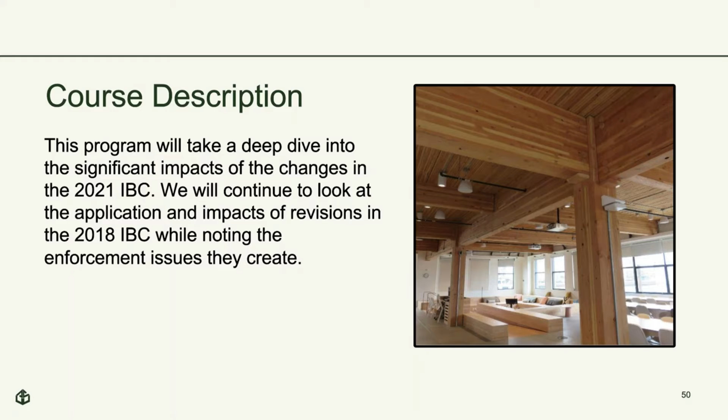Again, we'll be talking about what happened and resulted in the 2021 International Building Code. We'll be looking at those changes that we can, and discussing some of the impacts of those revisions.

Here are our objectives, pretty obvious for this particular class: to identify the differences between the previous code, the 2018 edition, and the 2021 IBC. I'll explain any new code concepts as much as I can in the time we're given, and try to identify the impacts of those revisions on the various groups out there, in particular on the enforcement side, noting those issues as well.

So we're going to start. We are in chapter 10. This is the first of those items identified as significant code changes in the 2021 edition. Very, very interesting to go through a lot of these.

Like I said in part 1, while ICC sometimes identifies these as modifications, I believe most even identified as modifications are really clarifications. And this really helps us with the application of the code to some of these areas, especially in chapter 10, where we need to provide egress paths from given areas within a building or structure.

In this case, these are largely unoccupied mechanical rooms and penthouses. Penthouses are an allowable projection above the roof line itself, so they don't count against the actual height of the building. The ICC code change in this case seems to identify the mechanical rooms as also being on the roof, but in reality, the way the code is set up, this identifies the removal of the common path of travel determination for these unoccupied mechanical rooms wherever they're located within a building.

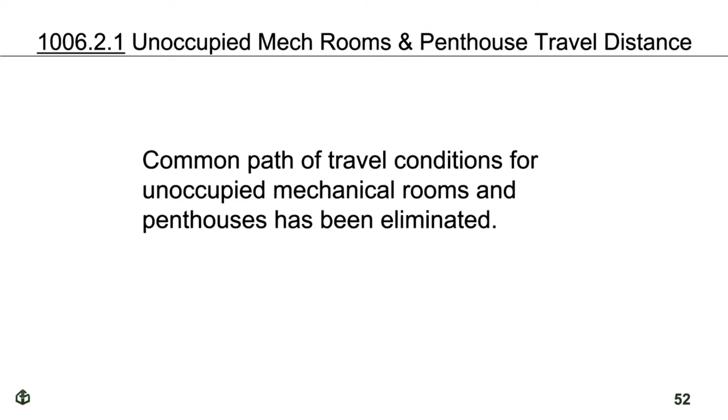Again, sticking with our exit access travel distance criteria, there is criteria in the code, a couple of tables that allow for a single exit from a story or an occupied roof now. The travel distance limitations are based only on exit access travel distance. We're already allowing a single exit, so we don't have to have the common path of travel determination applied in this particular case.

It was very interesting to see the common path of travel applied in some of these very large, typically complete floor build-outs.

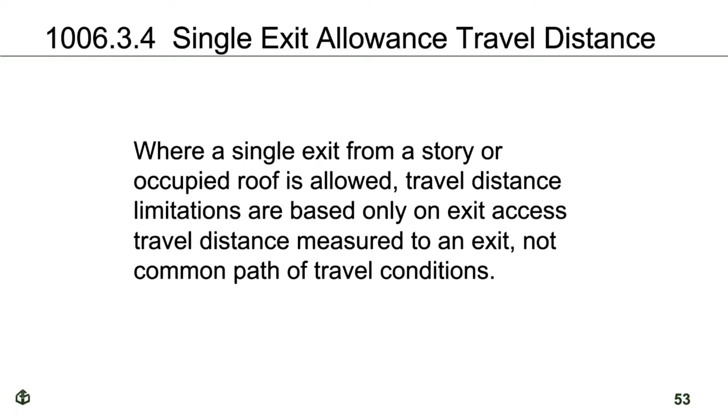They would have space left over for employee break rooms, things of that nature, and sometimes it was very limiting as to what kind of design you could have for those particular spaces. You may actually have needed a second exit access doorway out of some of those spaces in the past. In this case, this allows us to have some of these unusually shaped spaces, maybe very long and narrow, like a shoebox kind of thing, exist without having to have that determination or criteria to deal with.

Again, we do spend a little bit of time with illumination. Very interesting exit sign identified in the picture here, that's the running person. That is something that is accepted internationally and is making its way here in the United States much more so. Whenever we have exit access or exit stairways, we want to make sure that people can actually see what they're using, because stairways are inherently hazardous, just because of the tripping hazard.

And so the required level of illumination has been increased by 10-fold, from 1-foot candle to 10-foot candles. 1-foot candle is fairly dim. Actually, the picture in this slide kind of gives us an idea of what 1-foot candle may be like. I haven't measured this, it just looks very much like what I've seen for 1-foot candle type locations. 10-foot candles can be fairly bright, and so we like that.

Again, we don't want people to be surprised by that first riser in a stair, typically going down or going up, and then tripping and falling and potentially hurting themselves. So this is a very good code change. I think it was something that was kind of a weakness in the previous codes in terms of providing the actual protection we're looking for the occupants that are served by these stairways.

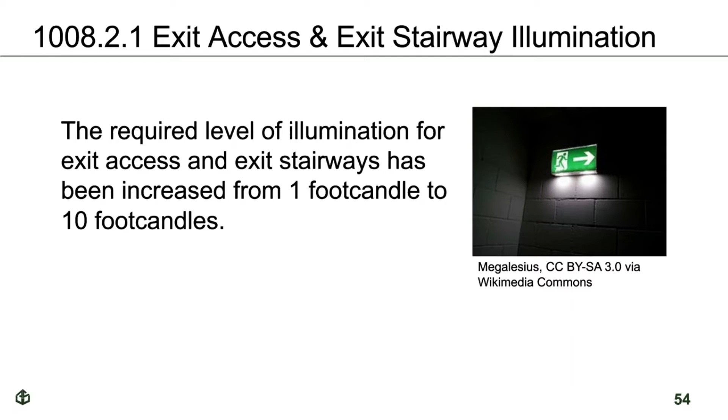We've added a new condition for when we actually have to have an elevator to different levels, and occupied roofs are now part of that. It's not just floor levels within the building. So whenever you have an occupied roof that is more than 4 stories above the level of exit discharge and all that, then we have to have an elevator to that particular level, including the occupied roof. Obviously there's accessibility concerns, there's a lot of issues built into this.

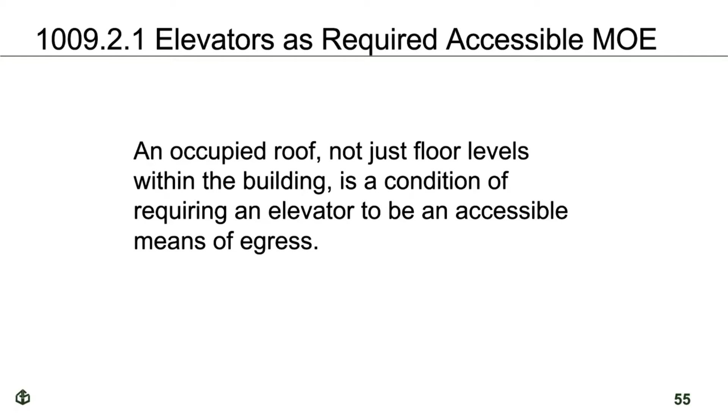This is in section 1009, which is for accessible means of egress. We want to make sure that those particular facilities that are located in and on an occupied roof are available to people with disabilities, and this particular code change recognizes that. There's been a lot of work with occupied roofs in this code and the previous code, the 2018. We're actually seeing this pop up more and more, and probably will as we move on into the future, certainly in the 2024 ICC codes.

Sticking within the accessible means of egress criteria, we have interior areas of refuge that previously were only allowed to go to an elevator lobby or a stairway, lobby, or landing, that kind of thing. We now can have these interior areas of refuge access exterior areas outside the building. It could actually go out to an exterior stair or just directly out to grade below with a landing and out to some sort of pathway away from the building.

The idea again is that people can potentially reside there for a short while, maybe there's some sort of a problem with getting down to grade from that particular point. And so we allow for that interior area of refuge to also access the outside, not just stairways or elevators, which basically recognizes upper levels rather than the level perhaps at exit discharge and the like, or at grade. So it's a good code change. I think this will actually serve people with disabilities very, very well.

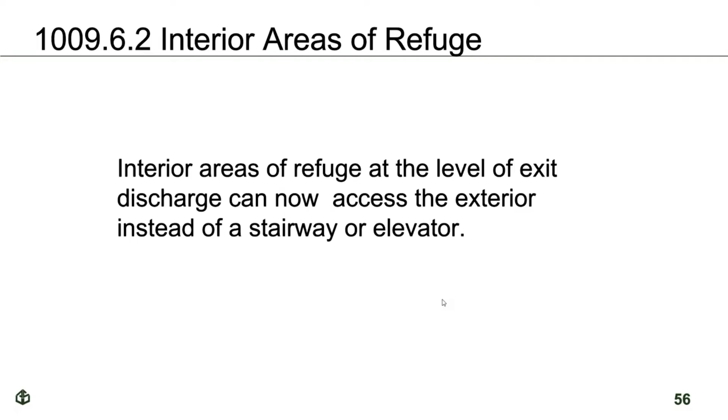We did notice that it was larger than the space we had previously required in most particular cases. This is something that's actually a little bit personal to me, and I think this is a great code change. We're still going to see a lot of accessibility code changes moving forward. In this particular case, we're still in the accessible means of egress, but we're getting a more realistic type of wheelchair space in those areas where we're setting aside areas like interior areas of refuge we talked about previously. So again, a very good code change.

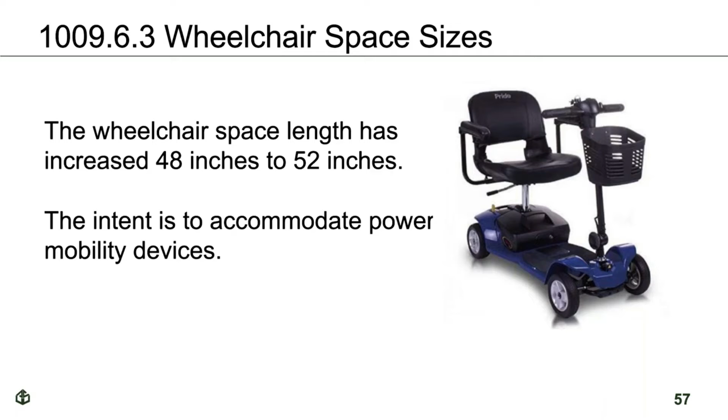Starting into chapter 11, we have a new addition. It's very interesting to see the adoption of standards. In this particular case, ICC is the secretariat for the A117.1 standard. They have been for a long time, as a matter of fact. I had the opportunity, when I was with the Model Code organizations, to participate as an alternate, and there are some very interesting discussions and work going on. You can see that the previous edition was the 2009 edition, and now the latest edition is 8 years later, 2017. This tells us that it's not really linked up with the adoption process or publication process of the ICC codes, as many standards adopted by reference are also not linked up. So we get these periodically. It's been a little bit of a challenge to get this one through, but they've done that, and we now have that adopted.

In the 2021 edition, we need to have this available to us so that in our designs, our enforcement, or the actual construction project on site, we know what those changes are, because they are in effect now when the local jurisdiction adopts the 2021 codes.

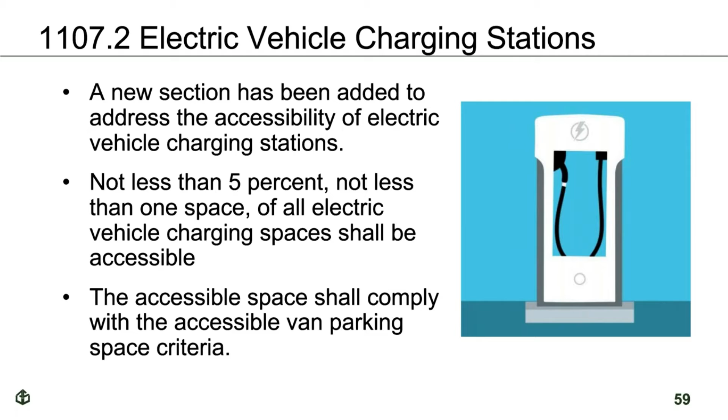The industry has been very proactive in working with ICC and others in developing accessible features to their charging stations. But we have this in the code, and this is a mandate that will be moving forward with the adoption of the 2021 code. We do see a lot of electric vehicles popping up now, and frankly see a lot of people using these parking spaces to charge their vehicles, sometimes even when they're not using the facility where the EV charging station is located. But they get to use that, and we have that out there now, recognizing this trend for EV types of vehicles.

Accessible bottle filling stations - we have a lot of these now. People are taking their hydro flasks with them all over the place. Whenever we have these stations provided, they shall be accessible. Mostly they are triggered, or activated, by either a press button feature in the back of the bottle filling station, or there's a sensor that notes that when the bottle is there, it needs to fill it. So typically it means they shall be within reach ranges, available to somebody in a wheelchair that needs to fill up their bottle.

However, there is an exception provided for those types of bottle filling facilities when they're over accessible drinking fountains. The drinking fountain is already accessible, and presumably someone can drink from it instead of just filling up their water bottle or hydro flask when they get to that particular point. So we recognize that as well. It's not a bad idea to have even these stations accessible, but that is not a mandate within the code based on this new exception.

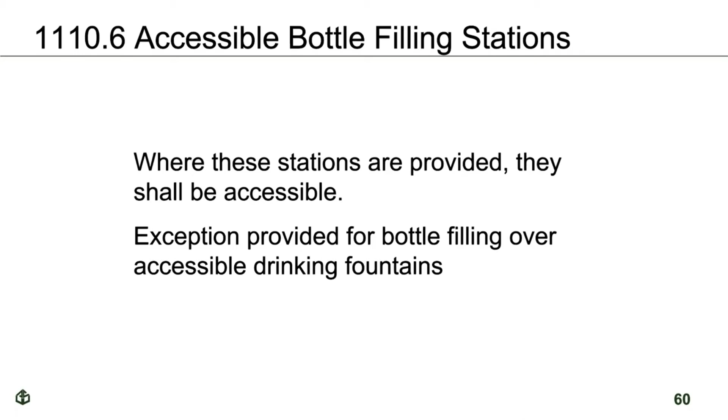Moving on into Chapter 12. This is a fun one. We're familiar with Group E occupancies - those are the educational occupancies. A lot of our jurisdictions across the United States do enforce the code for schools, typically primary and secondary schools.

This mandates that we have, using the A117 accessibility standard, enhanced acoustics for certain classrooms. Those classrooms where these enhanced acoustics are required have a volume of 20,000 cubic feet or less. The larger ones presumably have that and we're good with that, but we don't measure classrooms or any other building by volume typically. So we're going to have to know that.

Certainly for a very standard and regular, rectangular shaped cube, it's very easy, but not all classrooms have that. So we're going to have to go through and come up with a way of hopefully simply, otherwise we have to go through a much more complicated method of determining the volume of these classrooms.

So we have this here. In California, we don't actually use the A117 standard and all that - we have our own criteria, but we have this reference to the A117 standard as well. So it's the first time we're really getting to use that. It'll be very interesting to see how this plays out going forward.

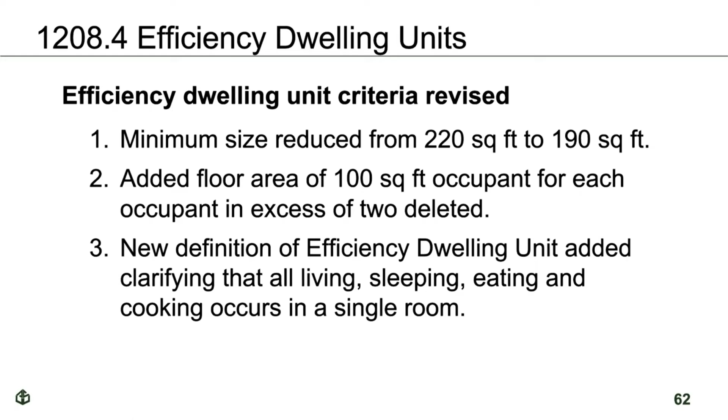This is going to be a very interesting one to try and design to and try to enforce. We've had this in other areas, but this one in particular has some very interesting nuances to it. So public restrooms are now required to be visually screened from the outside entry or exit doors for privacy issues.

So if you have a multi-facility type of restroom, you're going to have to provide either screening or perhaps a little different layout of the access into that particular restroom, so that when the door is open, people cannot look in and see what folks are doing.

So the challenging part is the second bullet. There's an analysis that's required if there are mirrors that could compromise privacy, that could be used to see people on the other side doing whatever it is they're doing. I don't know how or what method we are going to use to either design to that or certainly to enforce this particular provision. Obviously, there's a lot of public restrooms out there, and we're going to have to come up with something.

Now, like with so many things in the code, there's exceptions. A lot of people say it's an exceptional code as a result. But we have an exception, and an obvious one, for single occupant toilet rooms. Mostly because you get into that particular facility, turn around and lock the door. So if you're in there taking care of business, people are not going to be able to open the door and see you there. So we have an exception for that, but we're going to have some challenges with this.

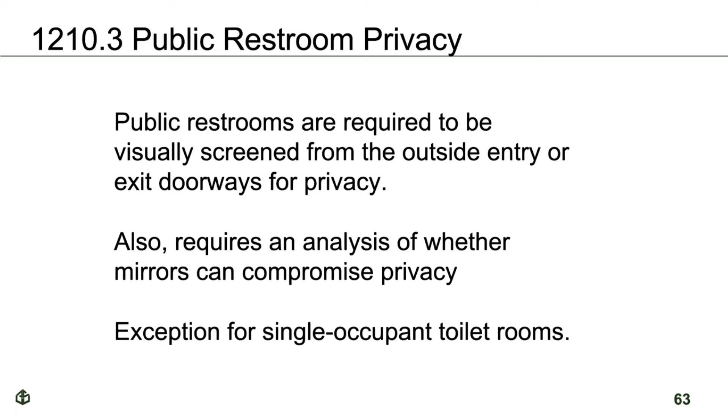It's a very simple code change, I think, but it's got some big impacts on both the design and the enforcement side, all told. So I hope there's not too much trouble out there with this particular one, and that ICC comes up with a good policy that can be used in terms of the methodology.

Chapter 14. There has been a ton of work, and there continues to be a lot of work in the code development cycles on vapor retarders and water-resistive barriers. There's a lot of concern with that. The control of moisture is huge. This particular code change reorganizes and clarifies the application of these provisions much more simply than I've seen in the past.

I have not enforced this particular criteria myself yet. Of course, I am with American Wood Council, so I won't be enforcing this, but in any case, we'll be talking with friends who are going to be enforcing this to see exactly how this works out going into the future. But I think they've done an excellent job making this criteria a much simpler set of requirements for the application of various types of vapor retarders, depending on whatever climate zone you're in.

And we have other criteria here too. The funny thing with a lot of this is that these particular code changes frequently go in front of the IBC structural code development committee, and it's not exactly a structural concern, but they get to hear all of the code changes and make a recommendation moving on to the ICC membership. So it's a very interesting thing. Note that this is related to energy conservation and the control of moisture. We're going to be seeing, moving into the future, for several cycles of codes, a lot more significant changes coming up.

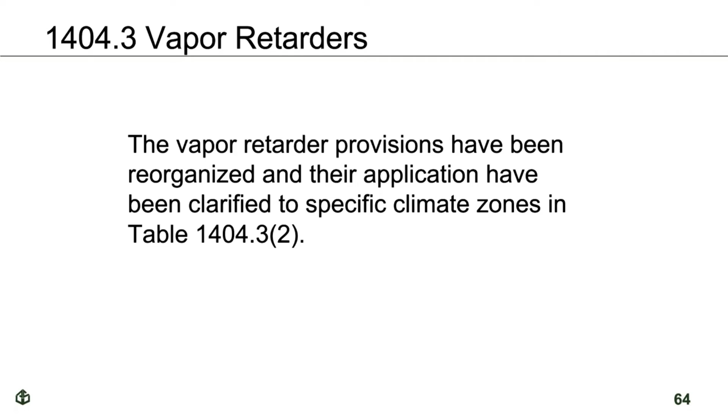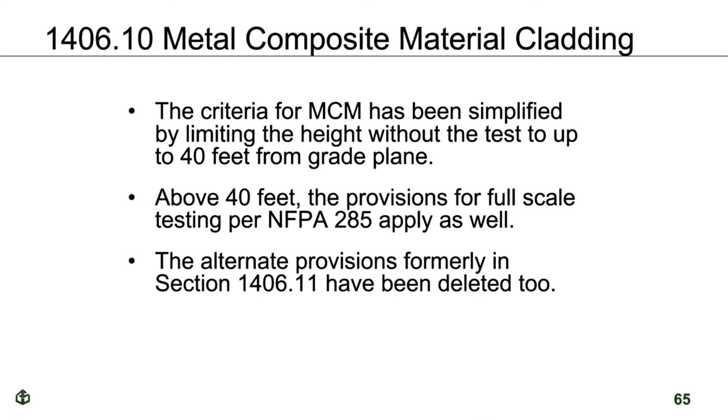The alternate provisions that we've had previously were not felt to be that desirable, so they were eliminated altogether. So we have either the prescriptive criteria that we have in the code itself, or the application up to 40 feet, and then 40 feet and above, we need to make sure that that particular product has an evaluation report or some sort of listing and is tested to NFPA 285 moving forward to provide the fire protection we're looking for in this particular application.

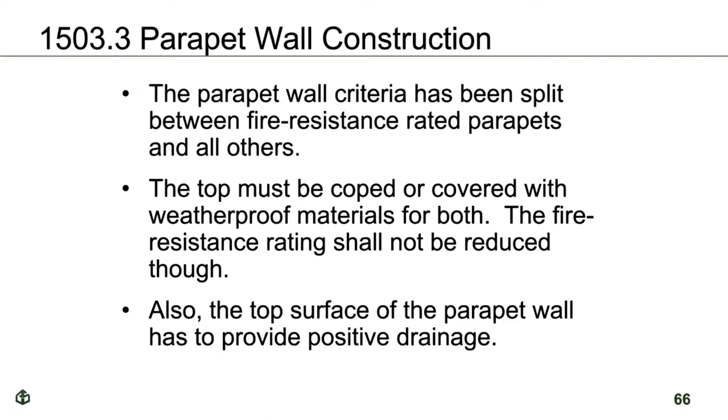It's a pretty small detail, but our inspectors in particular are going to have to know this when they're looking at these particular projects. Maybe they're large multifamily projects or hotels where you have interior parapets in particular, but this also applies potentially to exterior parapets when they're required.

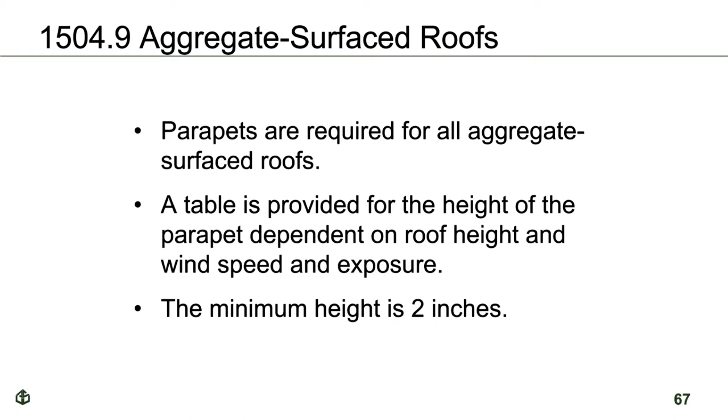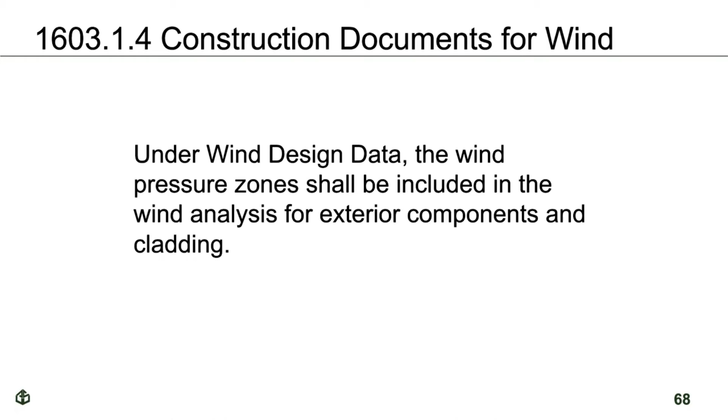A lot of this is being coordinated with ASCE 7, the ASCE and FEMA Seismic Code Support Committee, and others - NCSEA, the National Council of Structural Engineers Associations, and a number of other groups are tracking this very, very closely. They're trying to make what's provided in those structural standards consistent with what's in the IBC, and the IBC consistent with those structural standards.

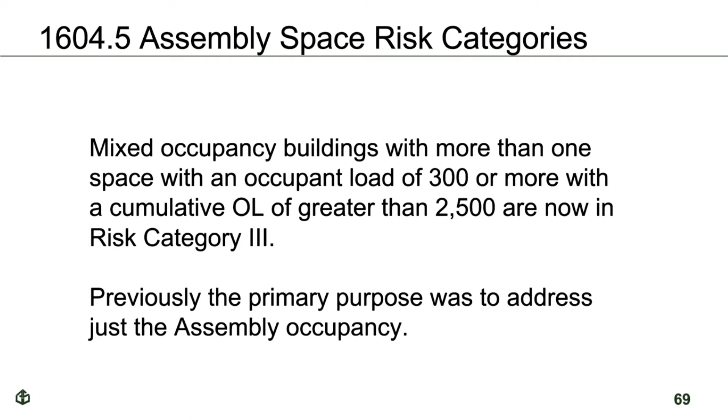I included this one, I just find it kind of funny. I don't know that I have ever looked at, reviewed, or designed a fixed ladder that serves some sort of industrial type structure, maybe an industrial work platform, who knows.

But we now have loading criteria for those fixed ladders, including ship's ladders. Those are just a little different design - they are ladders, if you will, just angled a bit, with a place for each foot.

We have this design now called out in the code, so when it's called out in the code, we have to review for that and design for that. A lot of these are prefabricated types of ladders and things of that nature.

Fortunately, they've been used over and over again, and the engineers involved with those industrial, factory, storage types of uses are very familiar with this criteria, but it's just something we now have to look for on the enforcement side in plan review.

Presumably out in the field where the project is being constructed, our inspectors are going to have to know that's done too. It can't just be something that's brought in. It could be an RFI where you send them back to have the ladder configurations reviewed by your plan review staff. But we have that now in the code, and we have to look for it.

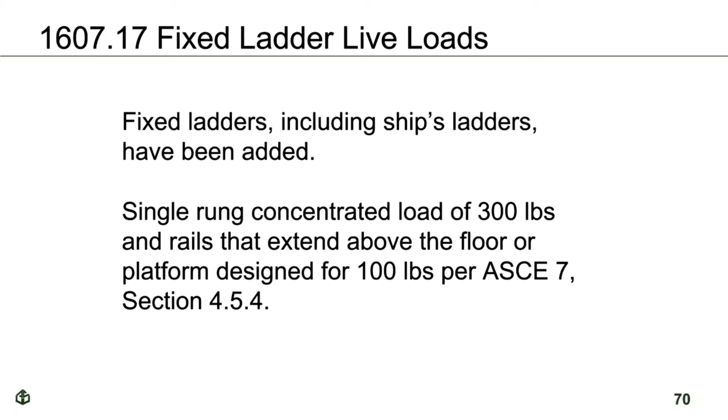There's more and more being added from a structural standpoint that we have to make sure is included within the construction docs and the analysis provided. It's a challenge at times - it seems like things are being added that we haven't had trouble with in the past, but we have to include them now. That's my opinion, and it's what I think has happened in this particular case.

Chapter 17, our structural observation and special inspection type criteria, basically causes us to view chapter 17 as more of a QA/QC type set of criteria. Structural observation was developed probably 30 years ago - it's been quite a while. I remember when the structural engineers were starting to bring this into the legacy codes and all that.

But we now have to make sure that the structural observation stages or inspections are called out in the approved construction documents. We want to make sure that's listed there so it's as obvious as it can be to anybody.

One unfortunate aspect of construction is that usually when you get into the job, those general notes, observation points, and special inspection requirements sometimes get folded in the back, working directly on the framing plan for whatever type of structure it is. But we need to make sure this is happening.

The structural observation process also has to be something that is known and continues to be a regular process for our engineers doing the design, so that their people can come out and make sure what's been in the approved construction documents actually occurs in the field.

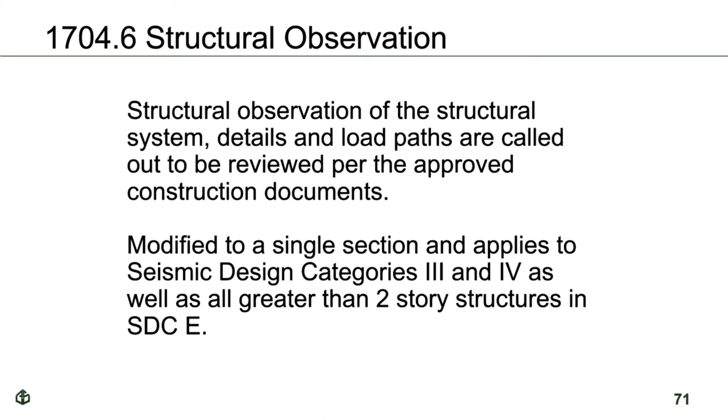Special inspection criteria - you're going to see not just in these slides today, but in other cases, that there is a lot more special inspection criteria. They're actually causing these special inspectors, or what people used to call deputy inspectors, to go out in the field much more so than they have in the past.

Typically they're looking at connections, and you can see certainly in this particular case that's what we've got. Although item 2 says the completion of reinforcement across joints, well, that joint interface is really like a connection.

We want to make sure those are done correctly and in a quality, workmanship-like manner, because if there's going to be a failure with precast systems, it's typically not in the precast element itself - it would be in the connections. So we want to make sure those are done properly. We get those.

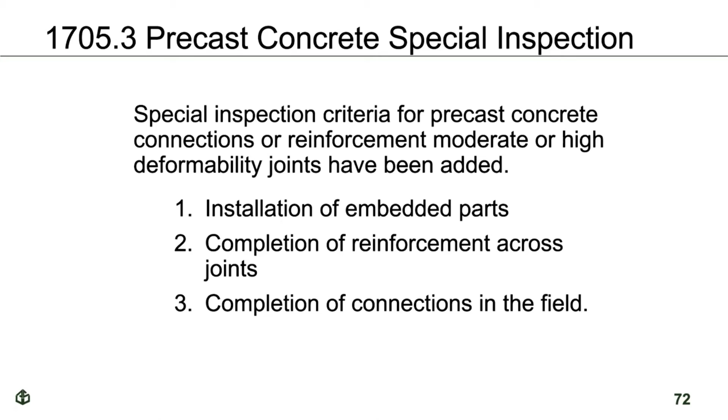We've got a lot of criteria in Chapter 17 that you're going to be seeing, some of that today. If you're not familiar with that, certainly you need to dive into this particular area, because the application of this criteria is becoming much more rampant than we've had in the past, and has really created a new industry group in particular for conducting these special inspections.

We've also now got an adoption of ACI 550.5, which gives us installation tolerances, which we don't have in just about anything else. But we have that here, and the special inspectors are going to make sure that in these precast elements, we're getting those elements installed within the ranges we're looking for. So we've got that now.

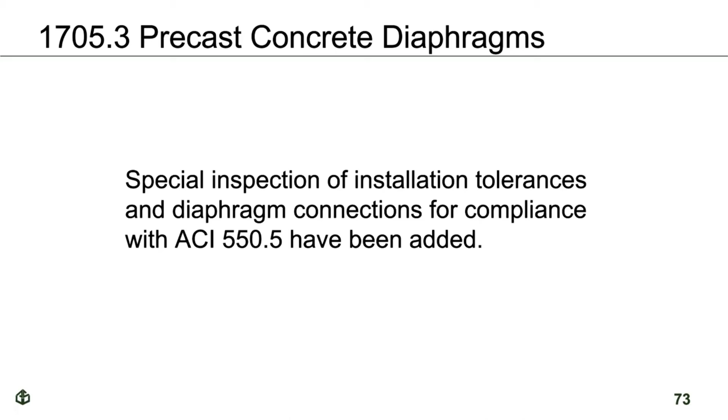ACI has their own standards development committee that has worked on this along with ACI 318 and others. We have that being handled by industry, so hopefully the people out in the field doing concrete construction, particularly precast concrete construction, know about this and are complying with it already. It's very interesting to see these standards added. Presumably we'll be looking at other types of tolerance-based standards in the future, and this is one of the first ones we've had.

Moving on into masonry, in risk category 4 structures, they've basically eliminated the application of empirical design, or empirically designed masonry. As such, we don't need to provide special inspection for it because it's not allowed. So effectively they've taken that out. It's a coordination code change with what occurs in the masonry chapter in the IBC.

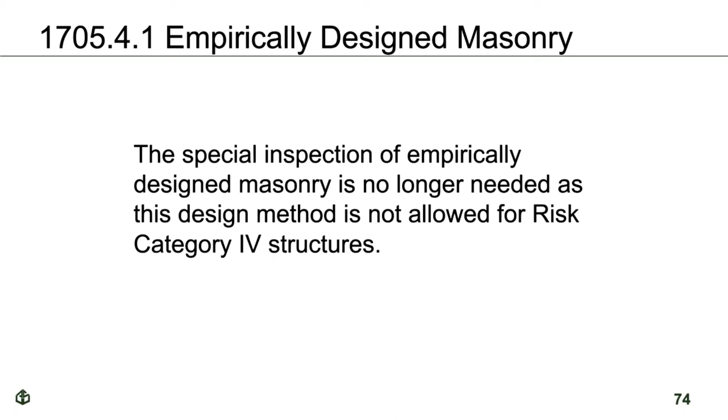Mass timber - we talked about this in the first part quite a bit, actually. It's really been, like I said before, one of the biggest code changes I've seen in the construction material area ever, honestly. It uses timber in such a way that it's brand new to a lot of us, and certainly the inclusion of type 4A, type 4B, and type 4C construction that allows for much taller buildings than we're used to is very, very interesting.

In fact, there's been some testing recently at the UC San Diego shake table, where they're testing a 10-story full mass timber building to different earthquake loads we've seen, based on earthquakes we've seen, to see how they perform. So we're going to see a lot more complete mass timber buildings going out.

As I said earlier, with special inspections in particular, we are concerned about the connections. These are like precast concrete - these are prefabricated panels, typically, or prefabricated elements. And so they have their own QA, QC in the factory based on their approval as an approved fabricator. So we're going to see the erection of the structure, which leads into all of the laundry list of connections that need special inspection as this building is being erected.

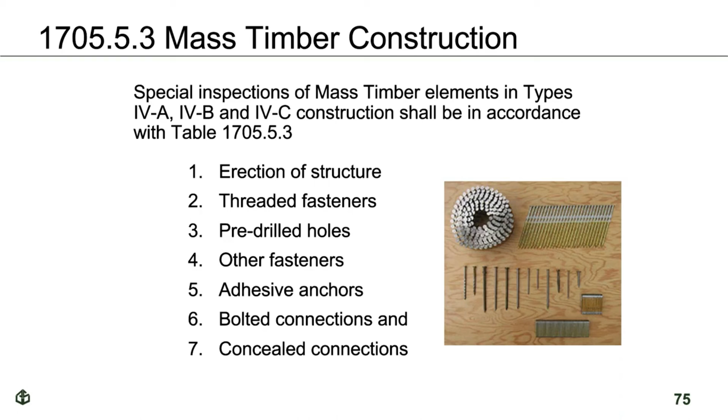Steel storage racks - this has been a fun one. We get a lot of steel storage rack configurations out there in our big box stores and our large distribution warehouses, among others. The industry itself, the manufacturers of these systems, has been very concerned about the application and installation of these rack systems. So they actually put forward this particular code change to make sure that what is being installed out in the field matches what is on their approved construction documents, because they have engineers that put these together based on the information they have for their particular products. They want to make sure that all that gets put into place.

So as we talked about earlier, special inspection is concerned about connections. We get that.

Items number 3 and 4 in particular are based on that: the completion of the storage rack system, making sure it's all put together well, and the anchorage—obviously we want to make sure that it's anchored down to the footing or the slab sufficiently.

Materials in compliance, fabricated elements and materials in compliance with approved documents is a very interesting discussion, because apparently in some cases, people are mixing and matching different manufacturers' criteria or elements in a given steel storage rack installation. And that's not a good thing at all—that violates their warranties and all of that. So we have a real problem out in the field.

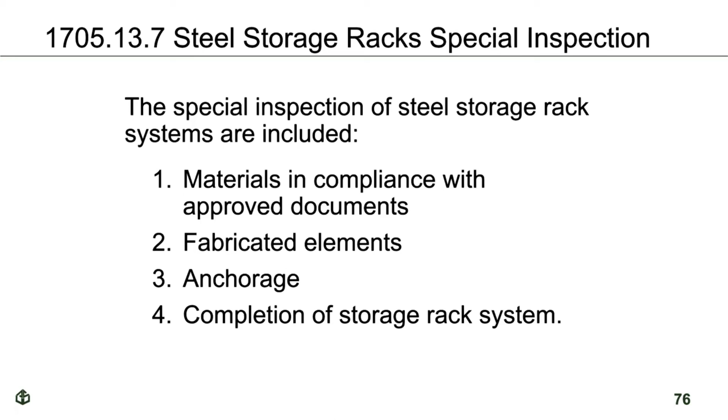In residential types of settings, very large residential settings, when you have fire areas maybe separated by firewalls, things along those lines, where there's an occupant load of 250 or greater—okay, we get it, the increased risk category. But in this particular case, we're in the special inspection criteria. We impose in the code special inspection of all of these penetration types of elements. So it's not just conduit going through walls, it's the joints in between elements, and it's even the exterior joints between cladding and a fire resistant floor that gets this criteria.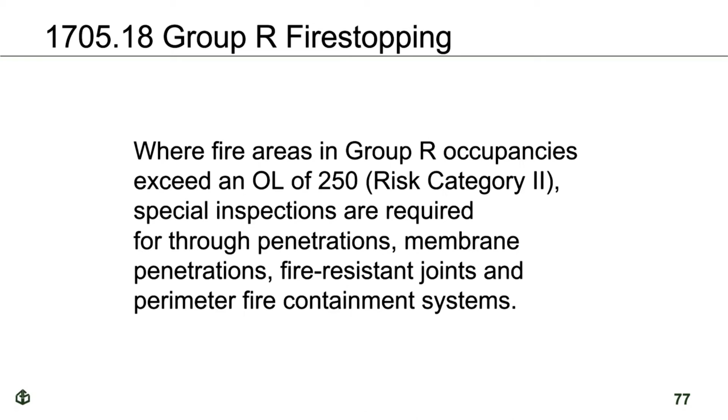We need to make sure that our special inspection staff are inspecting those and providing us with the reports that are necessary. We have a lot of people living in these settings, 24/7 presumably, right? And so we want to make sure that they're provided with the protection that we expect for these Group R occupancies, typically large apartment hotels, perhaps other types of settings too.

This one has a big impact on our inspection staff. We have now a label that is required for garage doors and for rolling, typically vertical rolling doors. That label has to be a pretty good sized label because it includes a lot of information. And then someone—this isn't 1705, this is not special inspection—someone is going to make sure that that label exists and that that door is appropriate for that particular installation.

So you get the door manufacturer, the make and model—we get that. Typically you see that anyway because they identify their various models and their own doors. But we also get the positive and negative wind design pressures that this door has been tested to and can comply with. We get the installation instruction drawing reference number, something I don't think I've ever seen on a label before. And we get the applicable test standard included. So we have to have all this information—our inspection staff are going to have to verify this so that that door can be approved.

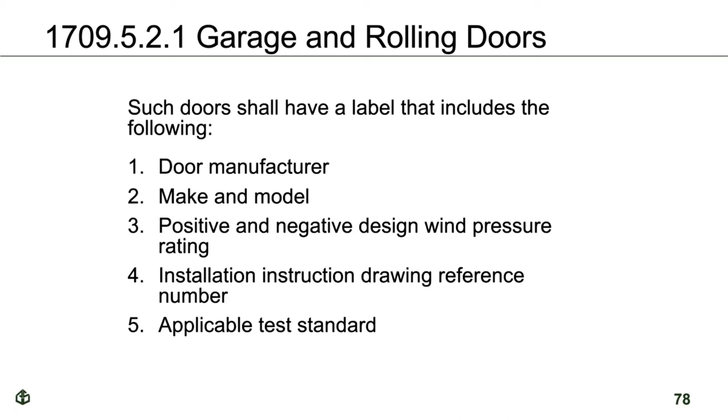Now, I haven't seen a lot of retrofit or replacement door permits in these types of settings, but if they do happen to come in, certainly we would make sure that this label exists. Typically in new projects, this is where we're going to see this more and more.

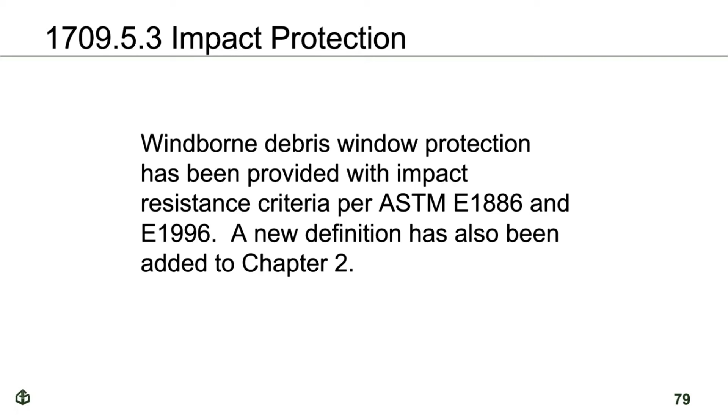Impact protection—in part one we talked about the definition, we already make reference to it in chapter 2. We have that criteria called out here. ASTM E1886 and E1996 are the standards for the window protection that are imposed in those areas where you have wind-borne debris. It's hard to say that for some reason, but we have that imposed here.

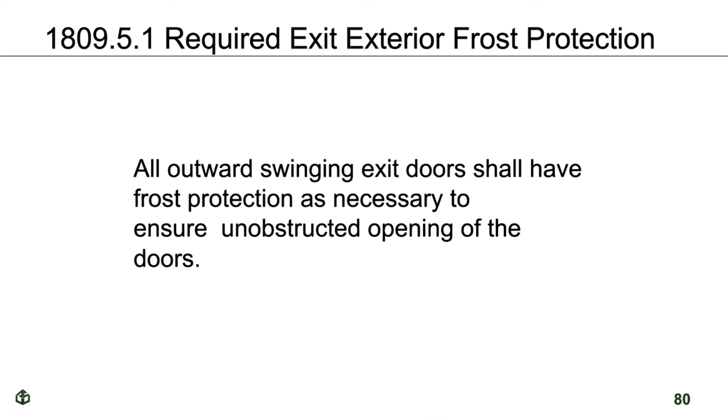Required exit—this is a funny one to me. Living in California, we don't get this that much, at least from day-to-day experience in the winter. But we have all outward swinging exit doors shall have frost protection necessary to ensure the unobstructed opening of those doors in the event of a winter storm, presumably, right? Very interesting considering that this year, 2022 into 2023, here in California and other parts of the country, we had a very big winter and had upwards of 40 feet of snow. Very difficult to keep those swinging doors clear and all that, but it's supposed to be there—we're supposed to have that kind of frost protection provided.

Here is more within our concrete tolerances. Again, in keeping with what we had with ACI 550.5, we have structural concrete tolerances also in the IBC. Again, the important thing is look at the exceptions.

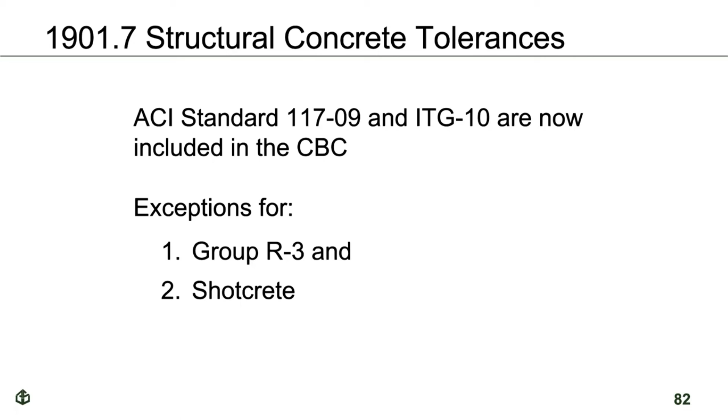Shotcrete, we get that gunite kind of thing, the tolerances aren't built into that. It really wasn't intended for that, and there's a different standard for that. And for basically single-family dwellings and duplexes, we don't have these standards imposed, but for everything else, we do. So know that that is part of the code that we're now starting to enforce.

Keeping up with the steel storage rack criteria for rack structures that are 8 feet in height or greater, of course, and there's plenty of those. You go into big box stores or distribution warehouses and all of that. We understand those, they are big structures. Also, they happen to be constructed in or proposed in a seismic design category D, E, or F. Again, being here in California, there's other places I get it that have this seismic design category.

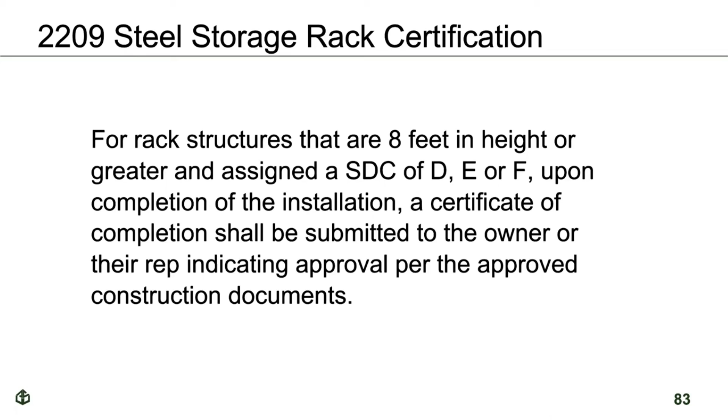A completion certificate is provided to the owner or the owner's rep, indicating that the system has been installed per the approved construction documents. This is in the code itself. We need to make sure that certainly the installation folks out there understand that this is here, and this is basically pointing to our inspection staff to make sure that they're getting these certifications, hard to say again, with these installs once they're done. Again, they're fairly tall, doesn't give a floor area per se, but they're in high seismic design category areas, and so we want to make sure that this has been done to those approved construction documents.

Chapter 23, we have a number of code changes here. I'm with the American Wood Council, and obviously we put an emphasis on this, rightly so. We have additional consideration for the effects of cross-grain changes that can occur when wood dries out after installation. Typically, we don't assume that wood is getting more moist, but that it's drying out because it's within a wall assembly or it's exposed to the interior and the environment is drying it out, pulling the moisture out and exhausting it to the outside. We want to make sure that any sort of dimensional changes that occur are accounted for in the design.

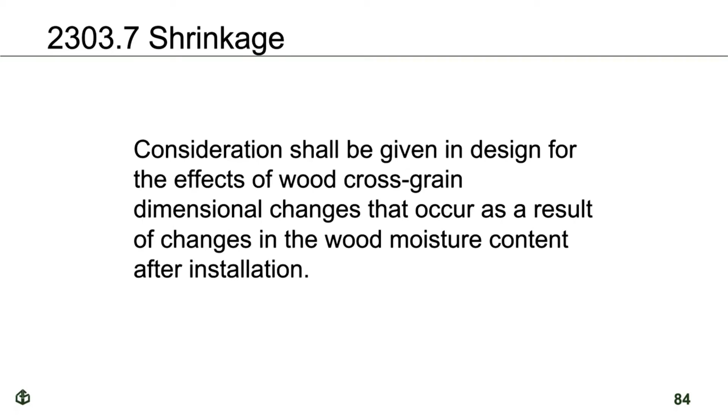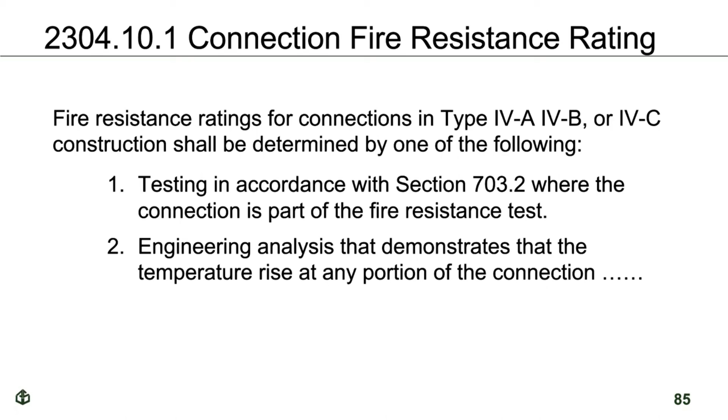Connection fire resistance, this is our mass timber criteria. Again, look at this, it's for our connections. There's protection applied to the mass timber types of construction A, B, and C, but we want to make sure that the protection for the connections is also provided. So there's either testing of the type of connection detail that's provided or some sort of engineering analysis that goes along with it that makes sure that our connections of these mass timber elements are going to withstand certainly the fire or the effects of the fire in that particular design. So we have that built into this criteria now, it's in the 2021 IBC.

We've got a lot more fasteners going on here. Typically, we're doing research, and in this case, there's been wind criteria that has caused us to look at the fasteners and provide a little more detail for our nails in particular. So we have that in our fastener table or fastener schedule, if you will. We need to make sure that that is in our projects, or at least imposed on our projects. This criteria is consistent with typically the national design specification that the American Wood Council publishes and promotes.

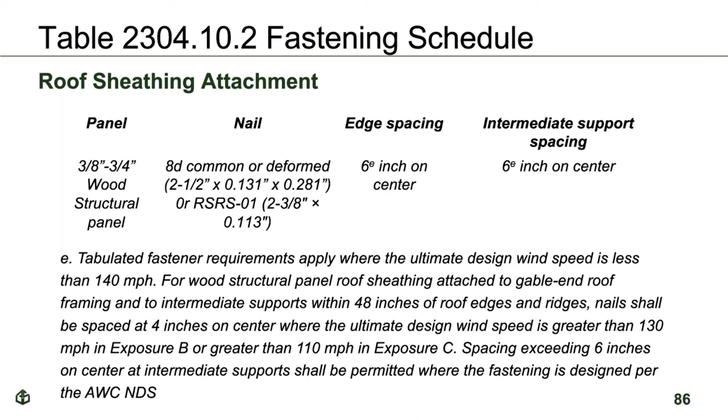Rafter tie connections, again, connections. You can see that there's a theme with a lot of these code changes. We want to make sure the connections are done in a code complying and quality manner, because that's where the weakness point is. We're talking about certainly our heel joint connections in this particular case. We want to make sure that they're provided in the manner that we need them. Take a look at this if you're doing wood design, Chapter 23 has a number of changes throughout.

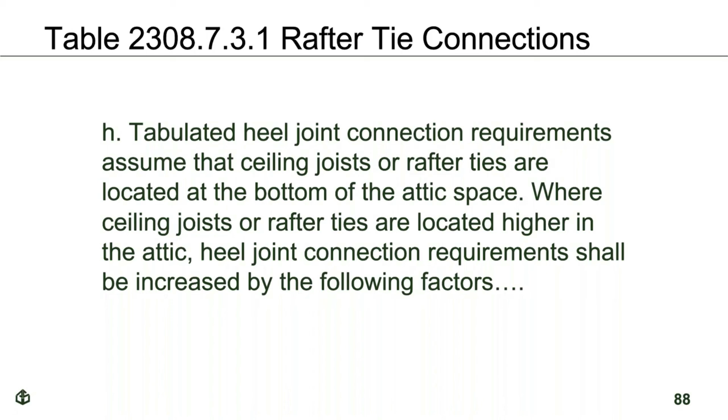We've only picked up on a few, but go through and get into that particular criteria and understand what's being imposed. We've moved on to chapter 25.

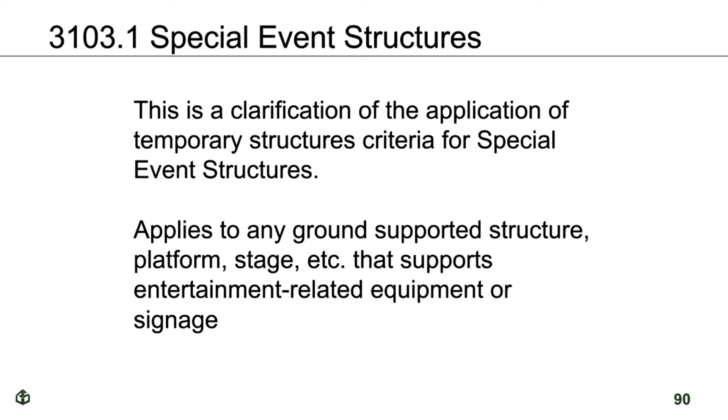Chapter 31, we're getting close to the end. This is a clarification of temporary structures used in special event structures. You can see the application at the bottom - ground-supported platforms, other types of, it's not scaffolding exactly, but other types of support equipment for lighting, for speakers, things along those lines related to entertainment events. So we have more information provided for those particular structures.

This is a fun one, the use of shipping containers or intermodal shipping containers. This has popped up. A friend of mine has had a huge impact here - he's the building official for the city of Long Beach, Trong Nguyen. City of Long Beach has the Port of Long Beach also, and right next to it is the Port of LA. So they have a huge concern with the reuse of these shipping containers. If you happen to have projects come forward where they're trying to reuse these shipping containers to create a brewery or in some cases housing, but mostly I've seen them in more office or retail types of settings.

We have the criteria now here. This has gone through a significant amount of review by structural engineers, by people in the fire industry, by all sorts of folks, and they've come up with criteria that's really very helpful when people want this unique feel type of development going on in their jurisdiction. We have a few around where I live that we go to periodically, and it really is kind of a cool feeling - outdoor music and things of that nature - and it gives some of our smaller businesses a chance to try and grow their ideas in a much more small and affordable type of setting.

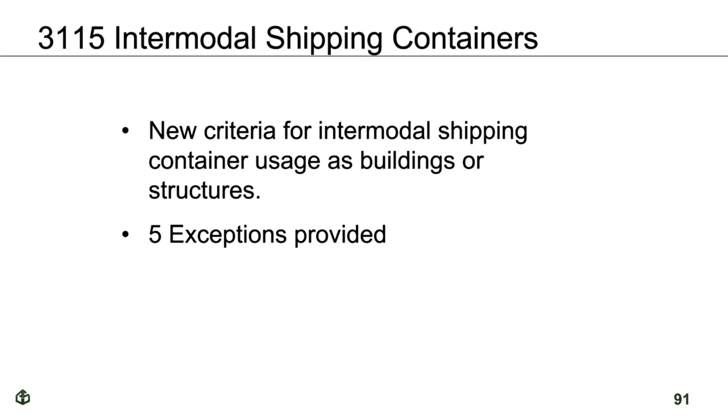Chapter 35. Again, we've already talked about at least one of these standards, the SDPWS. We have the permanent wood foundation design specification updated to the 2021 edition. We also have our cross-laminated timber specification in the code itself in the 2019 standards. So we're getting these more up-to-date standards out there for our engineers and our architects and certainly our plan review staff to use in the analysis of these particular projects. Industry goes to a lot of trouble to develop these and to provide the latest and greatest information for the design and enforcement industries.

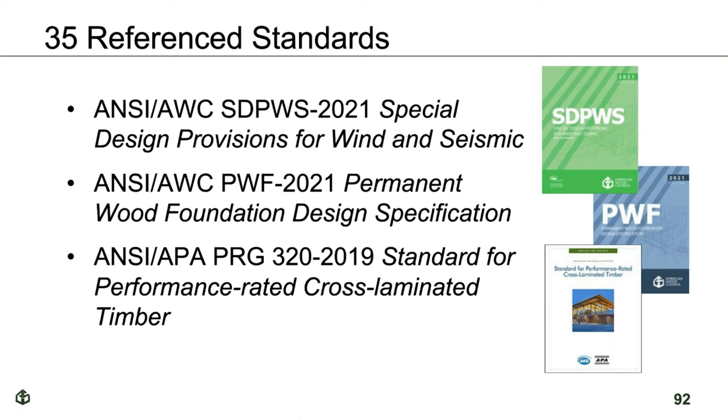Here we've moved on into the appendix. I think this is our last slide, actually. This is, however, a very interesting slide - very simple, just one sentence. But we have a new appendix chapter now that has been built into the 2021 code. It refers to, it adopts, if you will, the ICC performance code for buildings and facilities.

Other parts of the world, the international environment, can use their own performance code. We are starting to get this performance code built into a more regular part of our design and construction analysis. Very interesting to look at this. Know that this is the future. We are seeing more performance types of studies going on out there that are being put in front of us, typically by an alternate means, that kind of a thing. But we have this code now that we can use if we desire, moving on out into the future. We could have done that before, and some of us have, but we have that actually in an appendix that can be adopted by the local jurisdiction. So know that that's there. Know that, again, this is the future. If you're interested in this, or certainly you're starting out in the business, you better at least understand what this says, and where this is going.